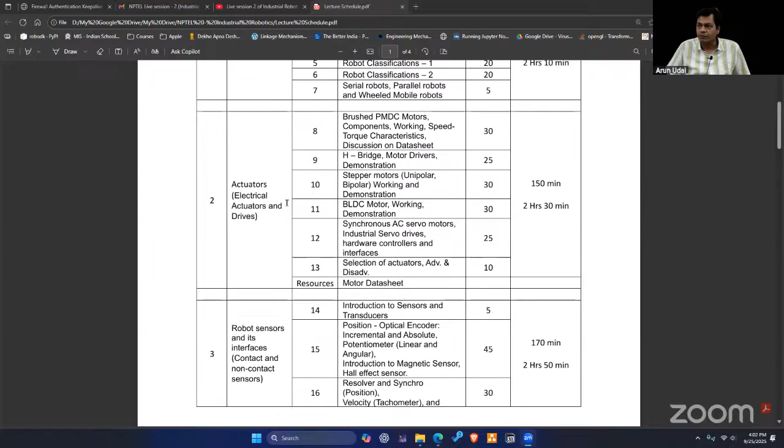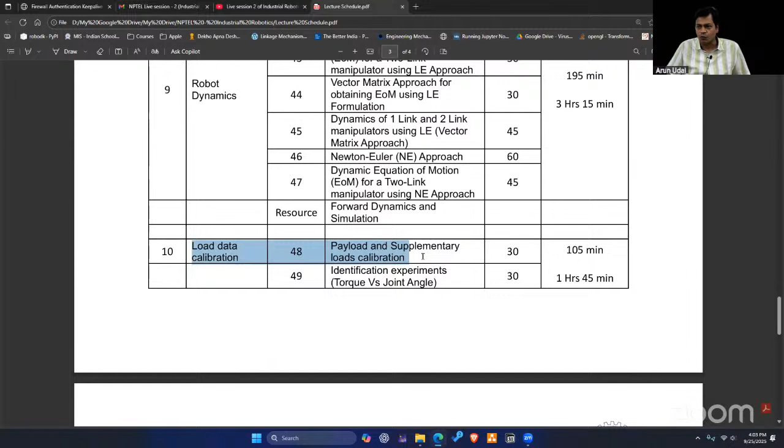Okay, so this week, probably we are already in week 10, right? So week 10, that is load data calibration. So far, I think the course is very, very useful for you all. It is expected because as per the regular syllabus, you have already done forward kinematics, inverse kinematics, differential motion analysis, and dynamics. That is there in most of the syllabus, and control also, of course, is there.

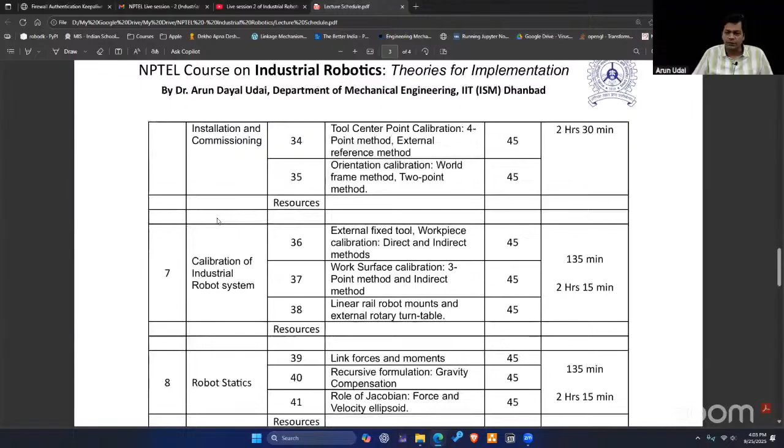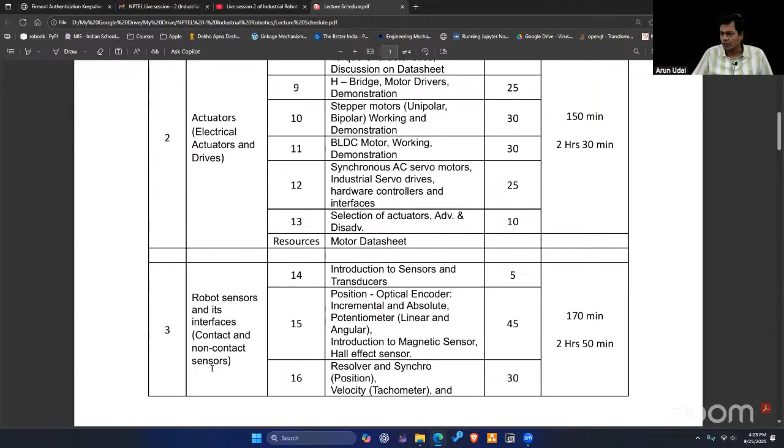Apart from that, a few additional things you have studied in this course. One of them, which is very unique, is the mechatronics approach, that is robots, actuators and sensors. That is there in quite a few textbooks, but not in a lot of curriculum. But still this has been covered in detail. I would suggest you focus upon the PMDC motor, which is okay because with that you can start making small robots.

That is fine, but to make professional robots, you have to be thorough with BLDC motors, not just the ESC, electronic speed control part of it, which may be used to just control the velocity, but you also need feedback, through an encoder or maybe a Hall effect sensor, with which you can do closed loop position control as well. So that is the BLDC motor. That you should be very much thorough with.

If at all you want to make a motor, definitely it works, but making it economically will be difficult. But to understand the principle, you can break open one of the motors and understand it thoroughly. There are a few Indian companies also who are making it, you can always find out.

And similarly, the AC synchronous motor, that goes into most of the large robots. You can always have a VFD drive which can control its velocity, and in closed loop you can control its position as well. That is the synchronous motor. So these are the few important motors covered in this course.

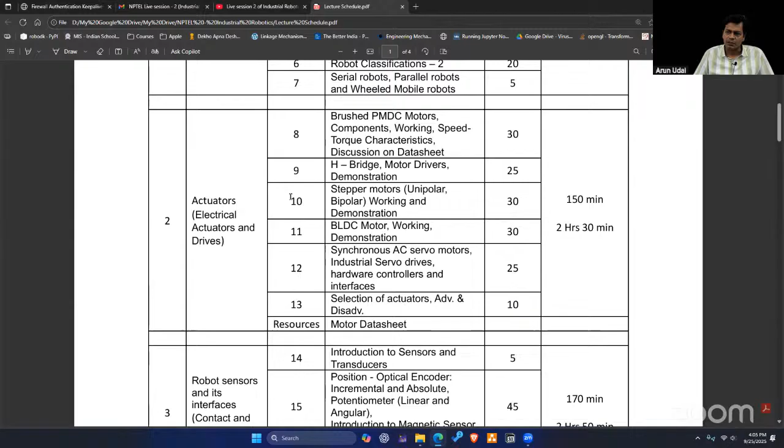The stepper motor is used in quite a lot of automated machines, especially gantries for 3D printers and those things. That may be useful at a small scale, but definitely not for big robots. Sensors is good knowledge that you had. Degree of freedom transformation, forward kinematics, it is there in your syllabus and you have already done it in this course, so should be quite okay, and I don't think many queries are there from that.

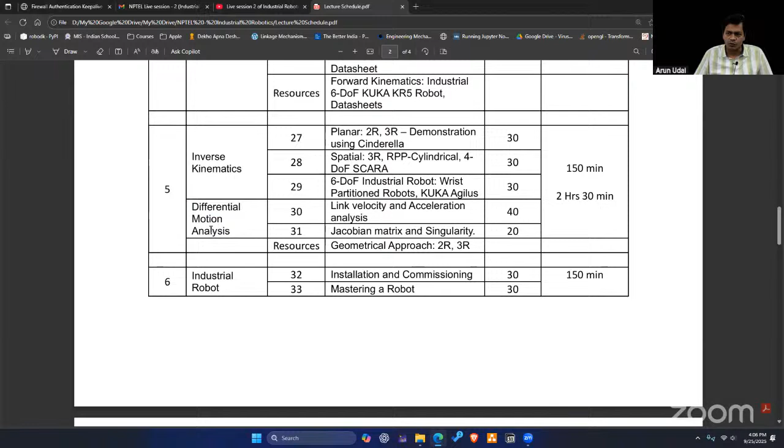Something very fundamental that you have learnt here, especially for teachers, is installation and commissioning of a robot. When a new robot is procured, how do you install it? This is one very big aspect that you have learnt. Mastering a robot, what is mastering? If your robot gets into an accident somewhere, you may require to do mastering. Even for a new robot, it is required most of the time.

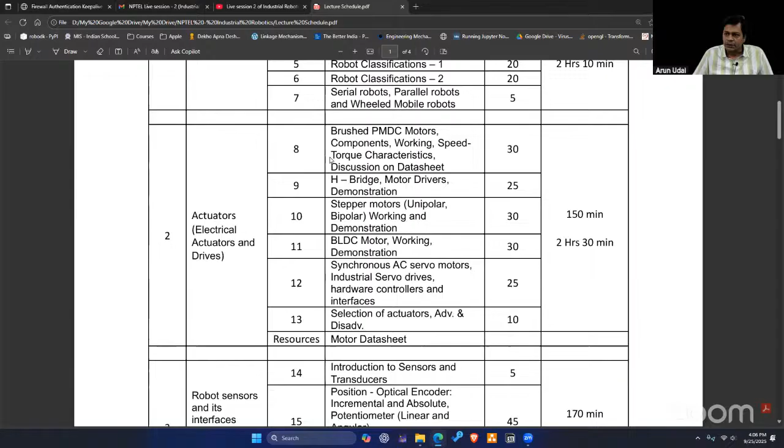ISO standards, definitely you have come to know. That was here in this module, ISO standard classification, right? So moving ahead, what else?

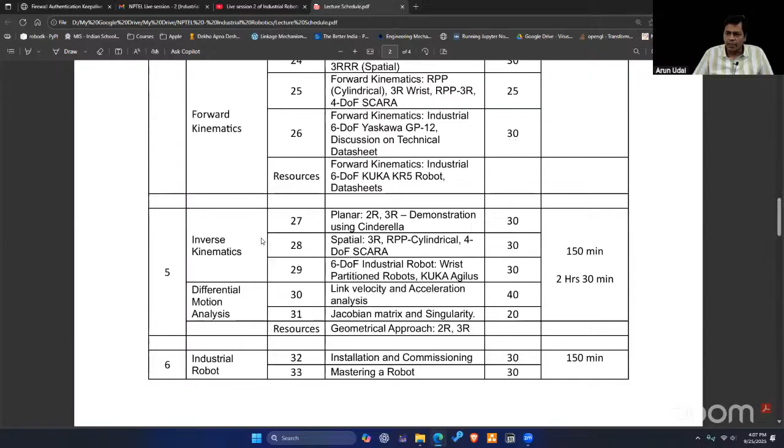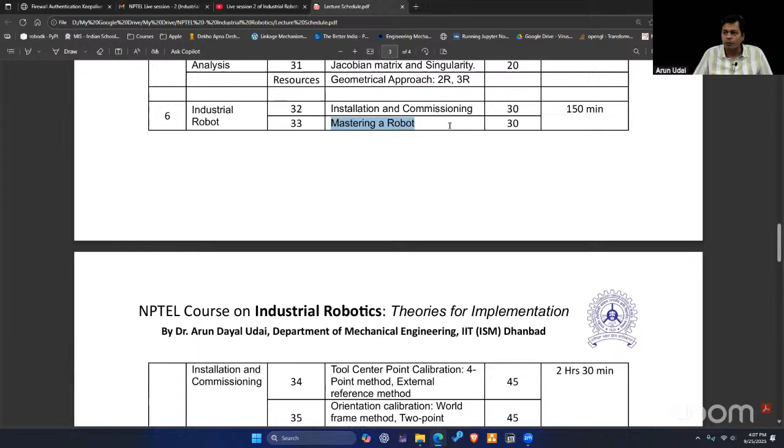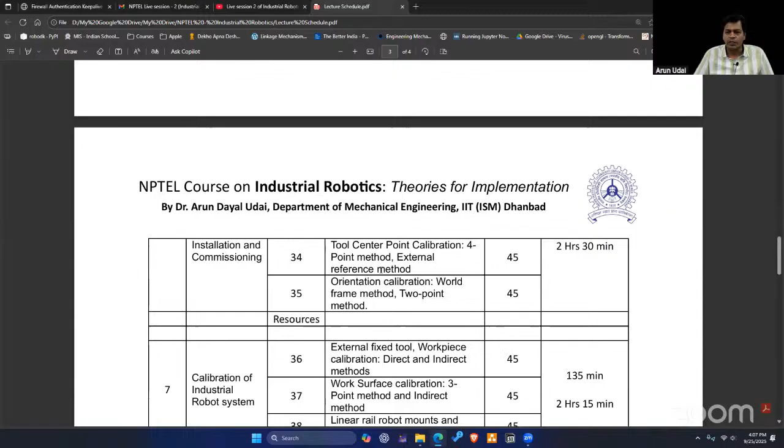Differential motion was quite okay. It is there in the syllabus and it is just taking the differential of that. Mastering a robot definitely is new knowledge. And installation and commissioning also included 4-point calibration. You must have seen your robot allows doing 3-point calibration. In this course, you have also learned the mathematics behind what actually goes on when you do that 3-point or 4-point calibration of your tool.

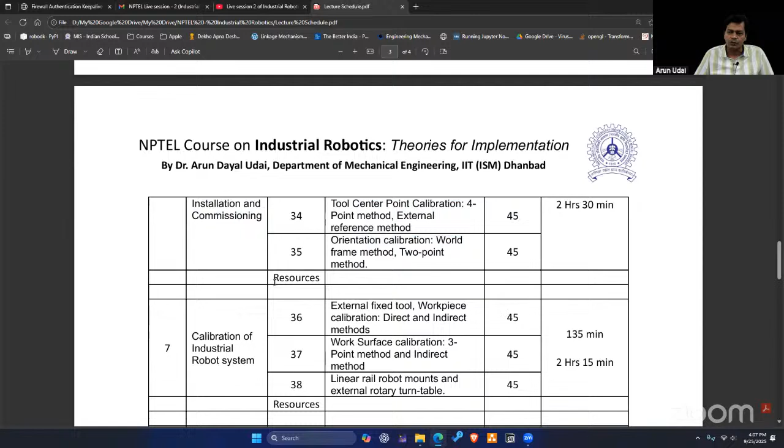Orientation calibration, world frame method, and the 2-point calibration method were also discussed. This is very useful knowledge. It is not there in quite a lot of books. Calibration extended further. In the 7th week, we also covered external fixed tool and workpiece calibration, direct and indirect method, work surface calibration, 3-point method, indirect method, and linear rail. If at all you have a linear rail, how to use it after calibrating it.

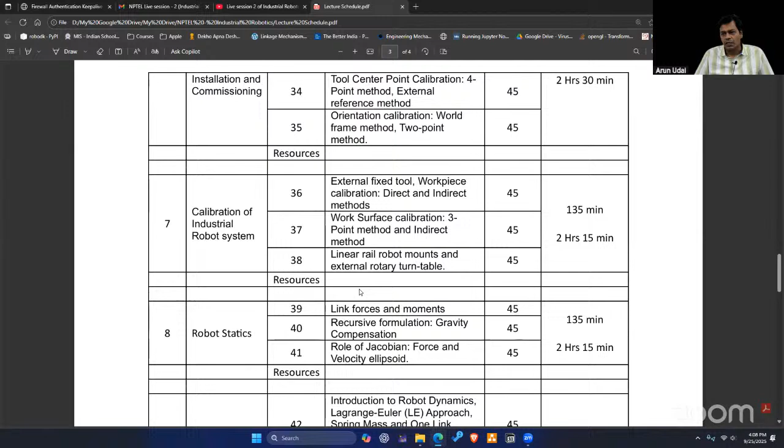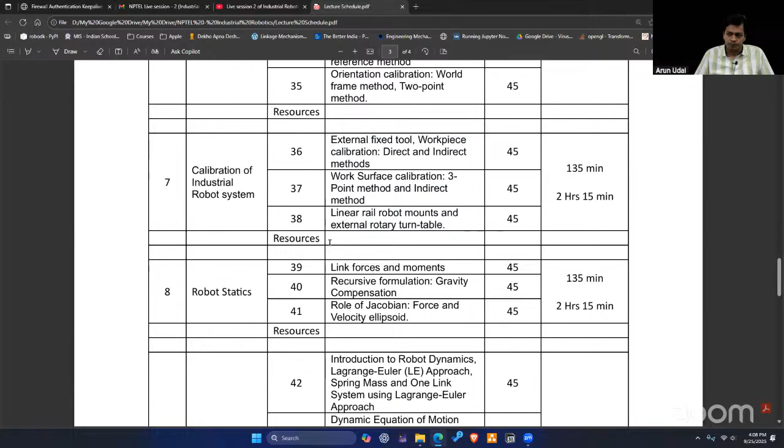If the robot allows you to do it, how it is done in the background on the controller is covered in this course. With this, robot manufacturers now know the mathematics. They can put this feature into their robots. So this is very, very useful knowledge which I have tried to cover in this course. If somebody is making a robot, they can put these features in the robot also, which is not there in quite a lot of Indian robots being made.

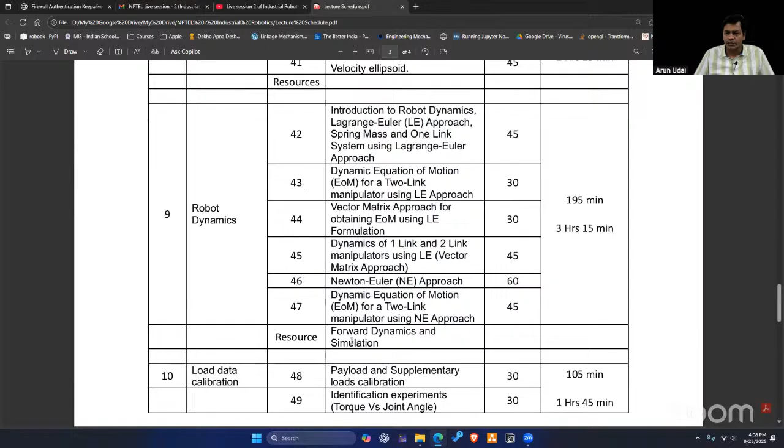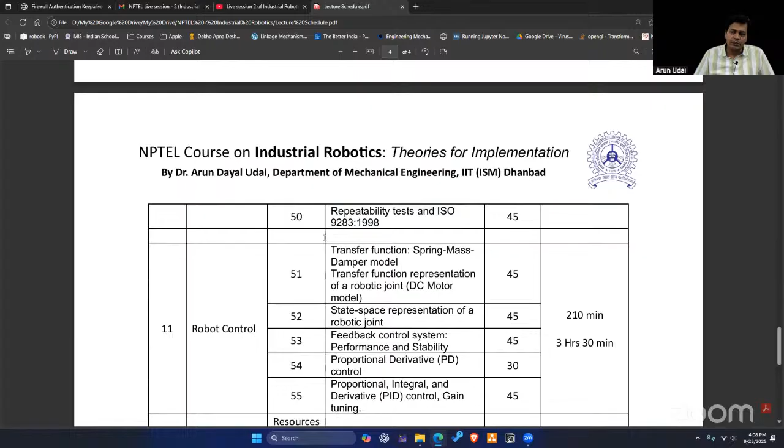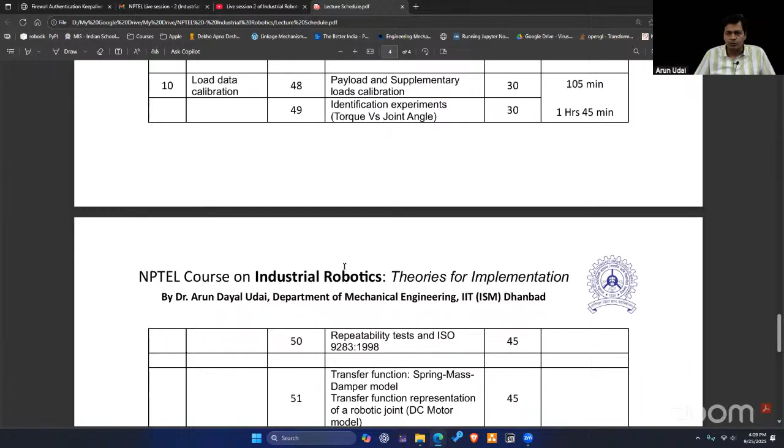Dynamics is very common. It is covered in detail. It is there in the textbook, nothing new as such. Load data calibration again is a new thing for you. That is very much required when you do the load calibration. And repeatability test I have covered very much in detail. I have also covered the technical specifications in detail for those who want to buy a new robot, compare two different robots, or put a particular robot to use. What parameters you should put in the tender specification, you know now. That was another very important knowledge for you.

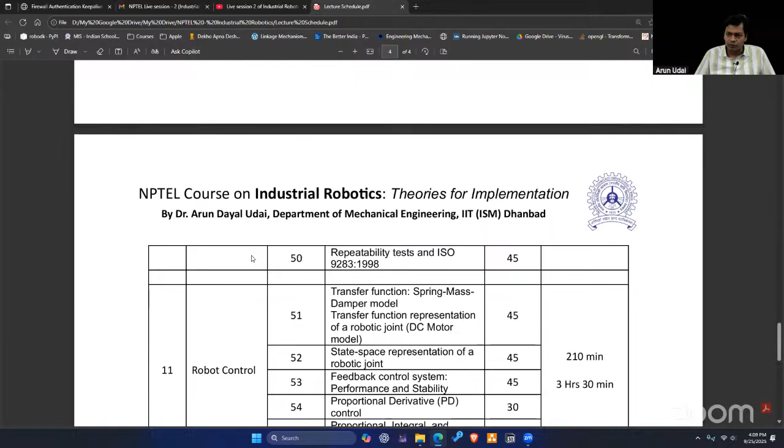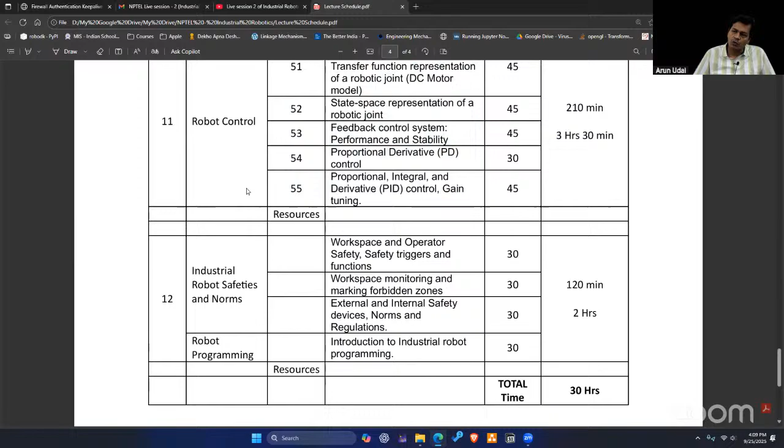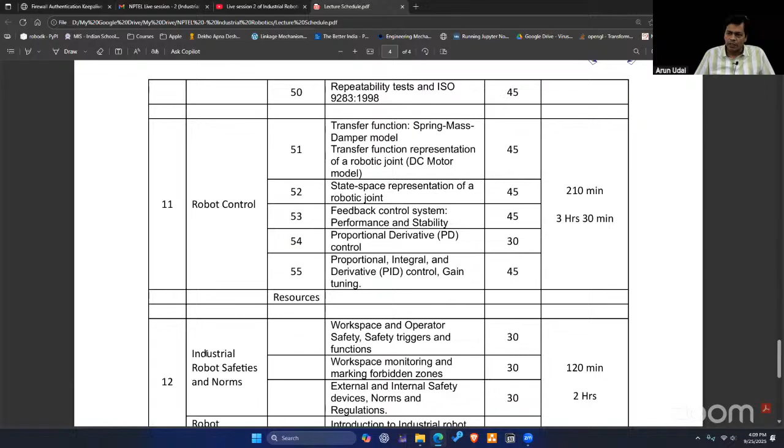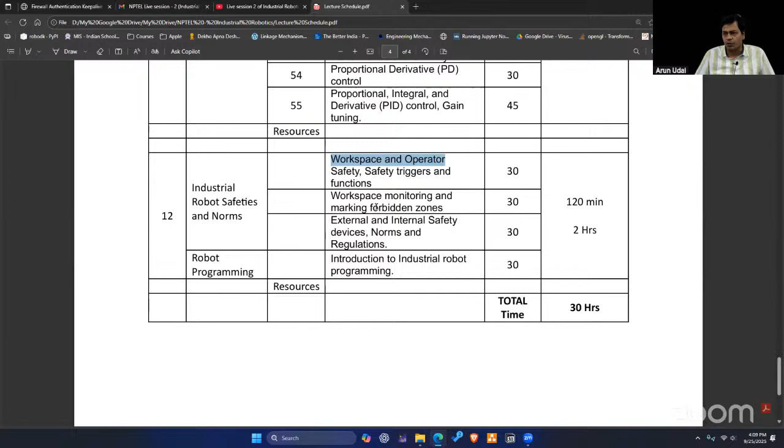So this course has got many takeaways. In the last part, now you are going through control of robots. Robot control is traditional classical control, nothing much new compared to the textbook. It has wide coverage in the textbooks also, so I hope it will be quite an easy flow. Week 12 is the last module, which is to come next. You will also learn something new there: safety triggers, workspace and operator safety, workspace monitoring, forbidden zones. These are something very, very new in this course.

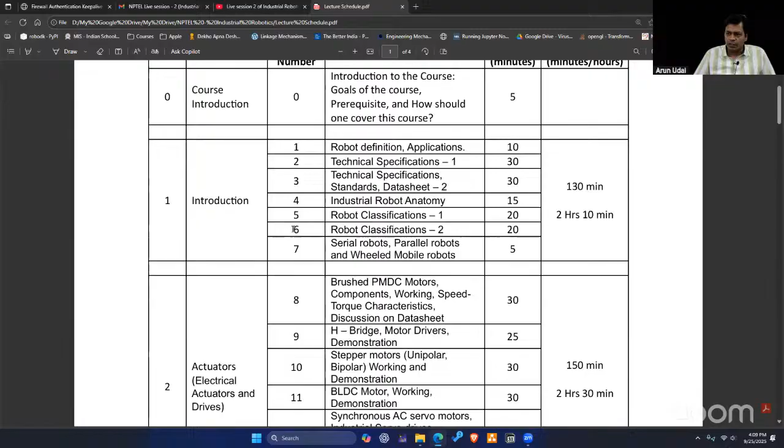So apart from what is there in the syllabus, I have attempted to cover quite a lot of new things which already exist in industrial robots. It is packaged and given to you. So I expect you to make a new robot which has all these features, all the features typically there in an industrial robot. Now you know the mathematics, you can code it in. Anyway, you are good coders, so I expect you can do it, no issue.